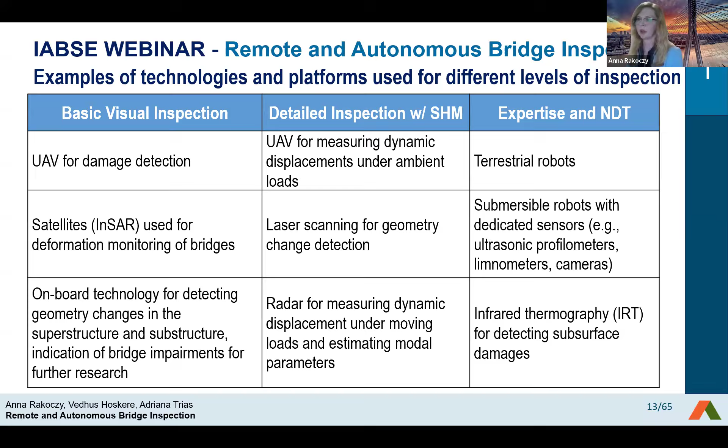So what are the advantages of using RITs and platforms? First of all, enhanced safety, reduces the risk of hazardous locations. Inspectors don't need to go to very high exposed bridges or some situations when there is active load and the bridge is still in operation.

Also time and cost efficiency when we have decreased preparation time and operating expenses associated with inspection. Also, RITs promote bridge management systems by facilitating the transition to digital bridge management systems. And last but not least, improved performance prediction, enabling the development of better performance prediction models and ensuring user safety.

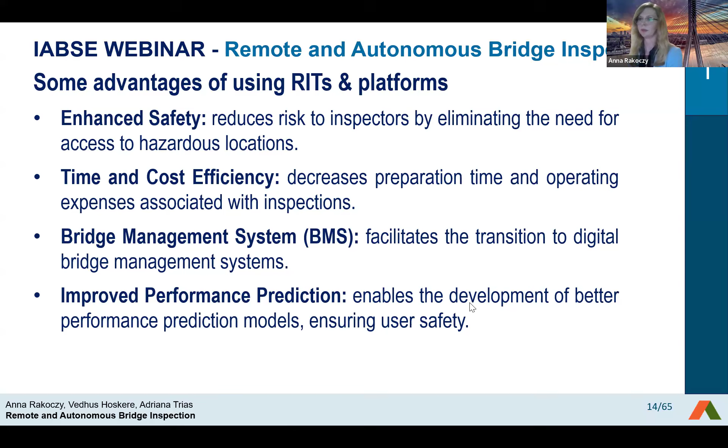Of course, with the technologies, we have also some limitations. One of the biggest limitations is the regulatory constraints. Sometimes we have regulations related to location where we cannot use UAVs. There are some restrictions, especially on locations close by airports or any military sites. There are specifically, by country and by state, different regulations, so it's better to verify that before you use UAVs for the inspection. But there's always a way of trying to get the permission.

Weather dependence, that's something that definitely provides some limitations, especially strong winds, bad weather, poor visibility may impact the possibility of using the remote inspection, or may affect the data acquisition and data quality. And the underwater challenges, when we have submersible robots, there are situations when there is just not the possibility of seeing through the water, or using the submersible robots with the water currents. So that's something that definitely can create a limitation of using the platform and technology.

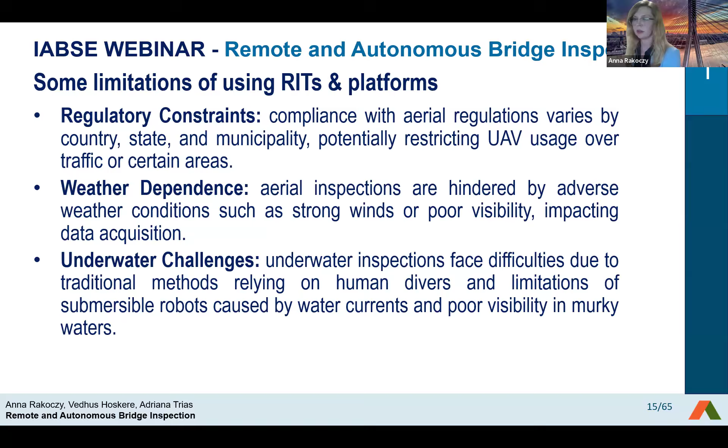I think now it's turn for Vedhus. Thanks, Anna.

So I'm going to talk briefly about some of these technologies that we can use for remote bridge inspection. Specifically, I'm going to talk about computer vision, which deals with making sense of pixels that are captured in images automatically so as to extract actionable information. So we'll go quickly over some basic concepts, and then when we go to the case studies, we'll see how this plays out.

Essentially, what we're doing is we're using different parts of the electromagnetic spectrum. We have some illumination. So when we have passive illumination, it's usually the sun that is illuminating the bridge. And then, of course, we can take pictures with different types of cameras to create images. When we use electro-optical cameras, like what you have in your smartphones, GoPros, or DSLRs and other commonly used cameras, then you can get typically 3-channel images where each channel corresponds to a different part of the visible spectrum, typically red, green, and blue colors.

But you can also have other types of images that correspond to other parts of the spectrum. When you have channels beyond simply RGB, but there's a discrete number of channels, then they're typically called multispectral images. And then you can also have a continuous stream of data across the channels. For example, if you look at a single pixel, you can have a continuous stream across different channels of the electromagnetic spectrum, and that's typically referred to as a hyperspectral image.

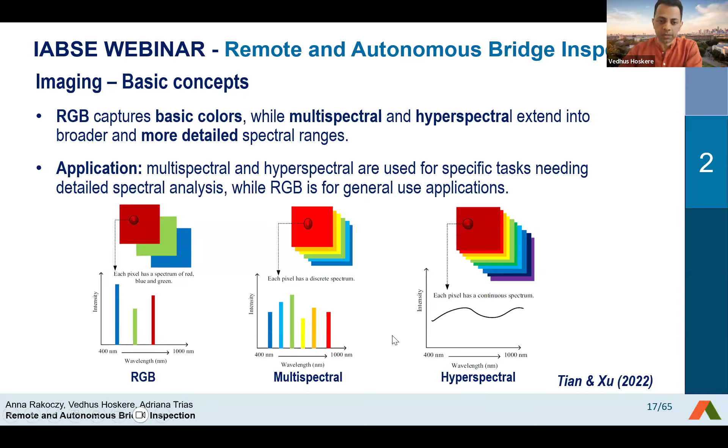Now, RGB images work by combining photodetectors that are sensitive to these 3 parts of the visible spectrum. And like I mentioned, they can be used for a large number of applications for inspections, because traditionally, and even currently, the main form of assessing the condition of an asset is with an inspector that goes out and carefully observes different parts of the bridge. And with the modern sensors that we have, it is possible to get close to the kind of fidelity and resolution that the human eye can pick up, provided you have the right cameras.

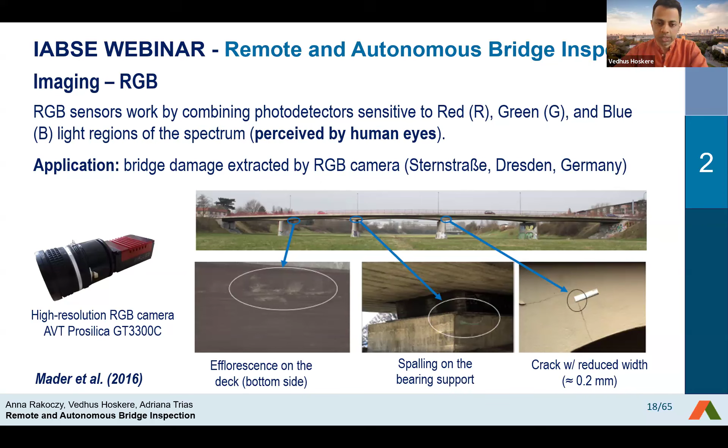And so it can then allow the inspector to document much of what they see, cracks, certainly spalling, and then also provide not only documentation, but the ability to then use that to make measurements subsequently. We'll talk a little bit more about how that happens. And also other defects such as efflorescence or corrosion that is visible.

Now coming to these other types of sensors, multispectral typically capture discrete spectral bands, looking at RGB or the near infrared spectrum, usually more than 3 but fewer than 10 bands. The spectral resolution, the number of bands, is usually not sufficient to distinguish fine-scale spectral features, which are features that vary in their response across different parts of the spectrum. Because there aren't as many bands, it's easier to process these compared to hyperspectral.

These are typically used for applications such as detection of corrosion, detection of anything that has moisture such as vegetation, and detection of delaminations, since delaminations have a different thermal response compared to the rest of the bridge. So multispectral data can be useful.

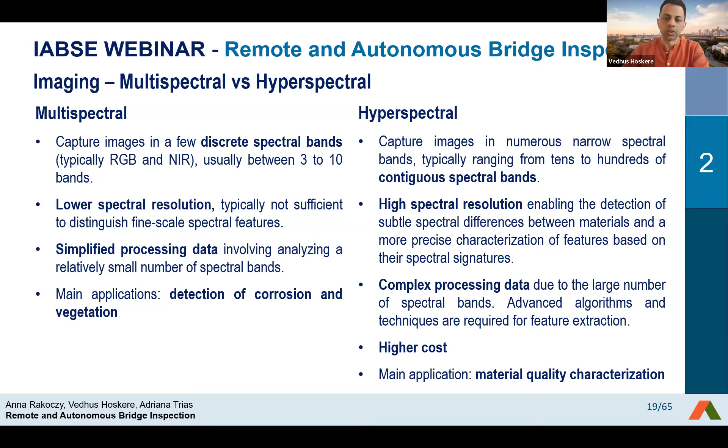Hyperspectral, on the other hand, has a much higher density of resolution across these bands, so it's more complex to process. It's much more expensive, and there's a huge amount of data, so you need specialized equipment to collect it. The main application is detailed material quality characterization, but you can also use it for detecting specific types of corrosion and corrosion behind coatings.

Here's an example of imaging with a multispectral camera, showing an RGB image and a near infrared image. On the image on the right, the result of processing, you can notice the locations of living vegetation, providing a different response compared to the rest of the image.

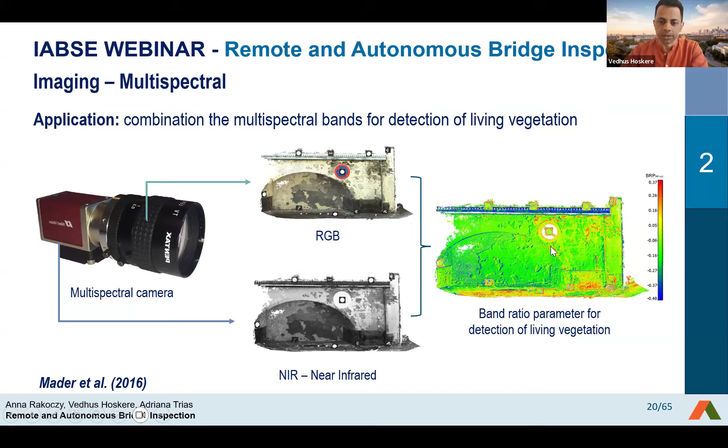Now here we have an example of the use of a hyperspectral camera. These images, because of the density across the bands, form a cube as opposed to just a set of matrices, so each individual pixel has significant data behind it across the spectrums. This is used surgically when you want to identify things such as early corrosion on steel components, as in this example on the Sydney Harbour Bridge.

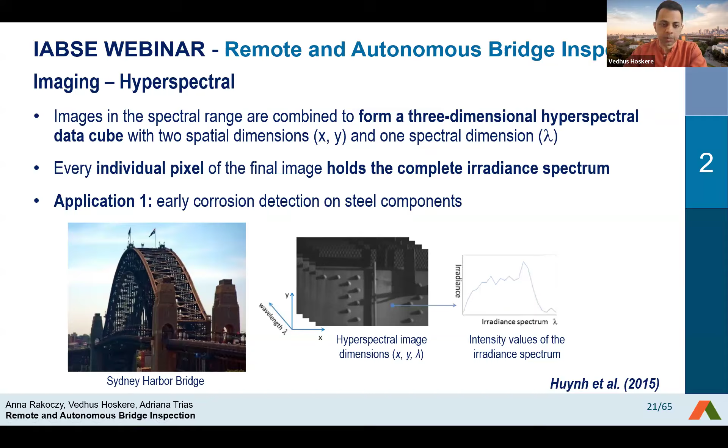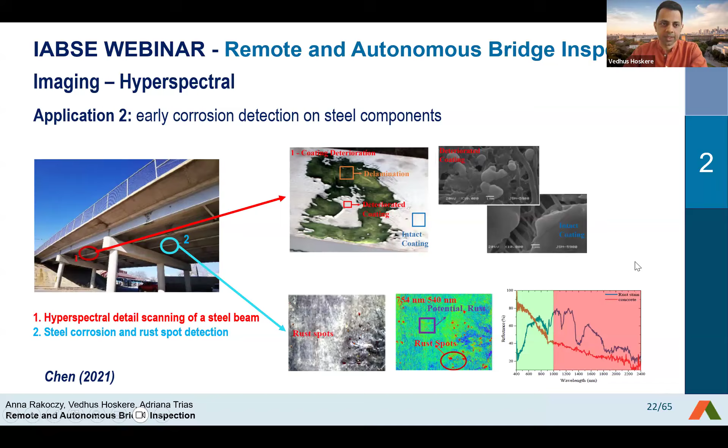Okay, I'm going to stop there and hand it over, I think, to Adriana. Me? Or to Anna, sorry. There's a couple slides for me now, and then Adriana.

Following up with the imaging, there is another non-destructive technique: infrared thermography. This technology relies on electromagnetic radiation within a specific wavelength range, considering material surface properties like absorption, transmission, and reflection, as well as volume properties including thermal conductivity and capacity.

During the process of collecting data, we look at passive or active IRT. Passive means utilizing a natural heat source like solar heating or ambient temperature changes. Active IRT requires external heating, like halogens.

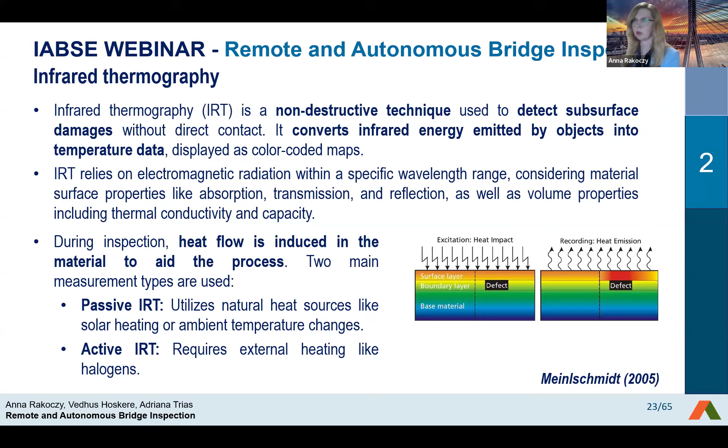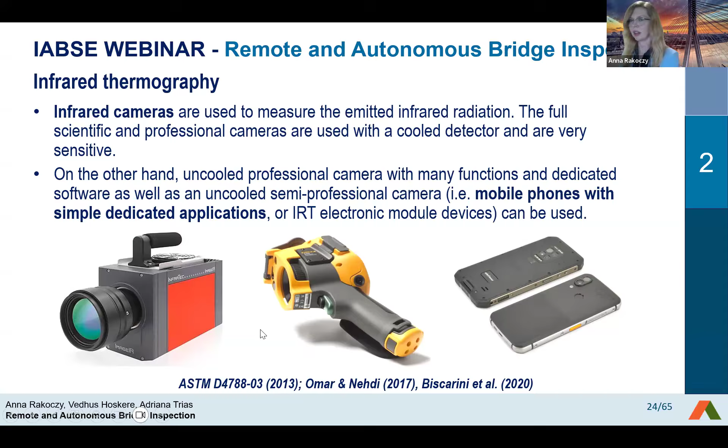To use this technology we need tools, which can be more advanced and expensive, but we can also use simplified options such as a mobile phone with a simple dedicated application, or IRT electronic module devices. This technology is developing, and there are more opportunities to use IRT even with cell phones.

At Warsaw University of Technology, one of my colleagues was using this technology to detect trapped water in the ribs of an orthotropic deck. There were several spans of this deck, totaling about 22 kilometers of ribs.

In some locations, the IRT showed a map of different colors, and we were predicting that these colors were linked to trapped water. During the visual inspection, we didn't see any corrosion yet outside, but after IRT inspection we were able to identify which locations possibly had that trapped water, and those ribs showing the darkest color were flagged.

We got permission to open a couple of them and confirm there were corrosion issues. So the IRT technique helped us identify where the issue was, and then confirm that with destructive testing. Unfortunately, once you know there will be an issue, we had to open it to confirm, which of course requires repair afterward.

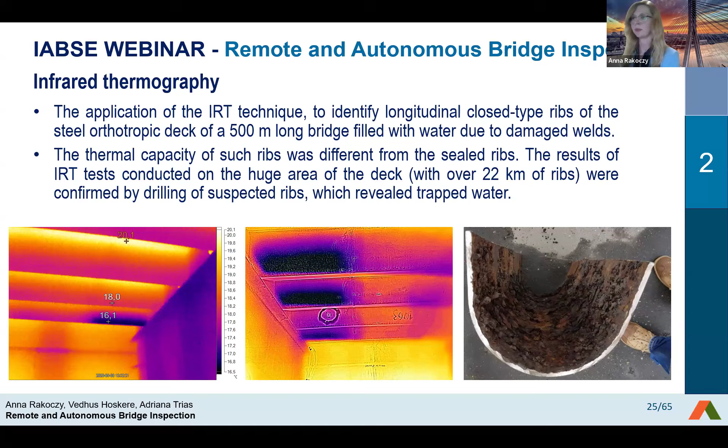But it shows that if you have a structure you suspect has an issue, such as with a closed section, IRT can definitely be of use, as an addition to other imaging methods. And Adriana, that's your turn.

Okay, so now I'm going to talk about LiDAR, which is the tool that I have more expertise on. LiDAR stands for light detection and ranging, and the technology uses a beam of light that quantifies the time it takes for that beam of light to touch an object or the surrounding environment and go back to the sensor. Based on that time, it can calculate the distance between the sensor and that object.

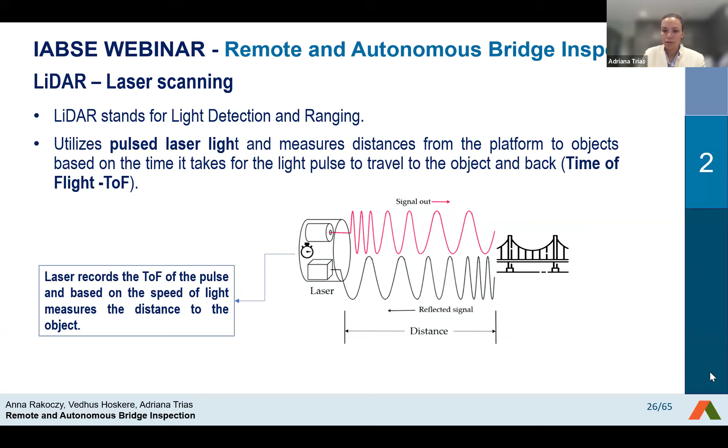It does this in a 360-degree horizontal scope, and vertically about 300 degrees, depending on the sensor, to create what we call a point cloud, basically capturing the entire surrounding of that sensor. It captures detailed geometric information. It cannot see through objects, so it cannot investigate box girders or anything enclosed. It cannot see through or inside, but it can characterize the external surface.

It provides point clouds that contain X, Y, Z coordinates, so we can convert these point clouds into as-is 3D models. This facilitates geometric surveying and supports rehabilitation projects. Once you have this point cloud, typically the information you have in the office is as-designed or as-built. The 3D point cloud will get you as-is. So if there's any spalling on the surface, any excessive corrosion that would decrease the thickness of steel members, all this information can be captured because it's changes in geometry, which can be captured with the LiDAR sensor.

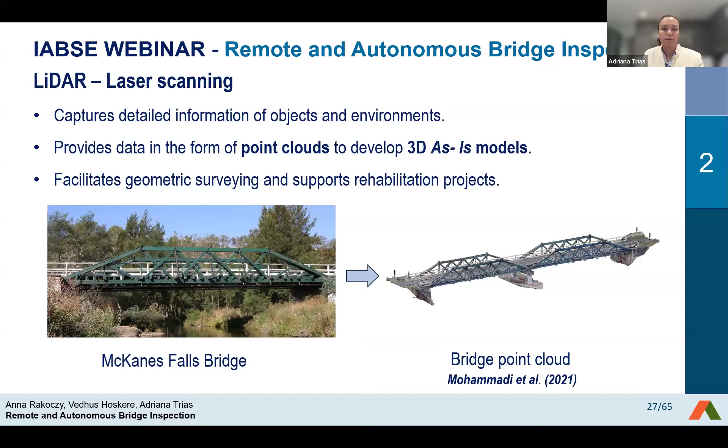LiDAR has 3 platforms it can be deployed on. Terrestrial laser scanning, or terrestrial LiDAR, is mounted on a tripod. It has to stay stationary while collecting data, and it has a higher accuracy among the 3 platforms, and it's ideal for 3D scanning for BIM purposes.

The mobile LiDAR is different in the sense that the sensor can be moving while collecting data. The accuracy of the mobile LiDAR is about 10 millimeters, whereas the terrestrial was 1 millimeter, so it's not as accurate, but it can collect data on a much larger scale. When we talk about mobile scanning, you mount the sensor on a vehicle and drive through while you collect data. In that sense it's ideal for mapping and capturing fine details on that range of 10 millimeters.

And finally you have airborne LiDAR, where you have the sensor mounted on a drone. It's typically the same sensor that you have for mobile scanning, just used for airborne scanning. So same accuracies, but because you're on a drone, now you can scan even larger, covering larger distances and larger scales among all 3 platforms.

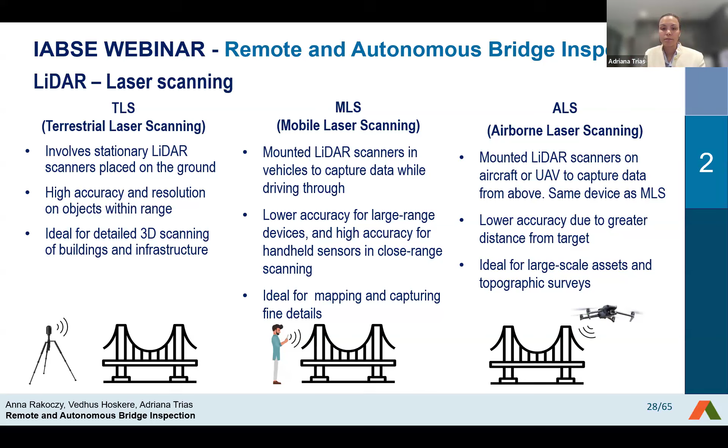So with laser scanning, the idea is that you can combine all 3 platforms. Maybe you have terrestrial, mobile for larger distances, and aerial for areas you can't reach, that terrestrial doesn't allow you to reach. You can mount your sensor on a drone and reach those areas that humans do not have easy access through. You can then combine all of these technologies, or all these point clouds that you capture with each platform, and create the 3D point cloud by combining all of them.

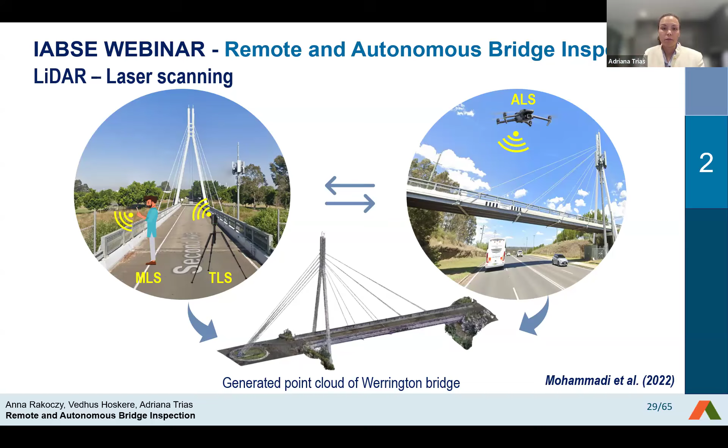Okay, so data processing. The first step for data processing is the improvement of station connections. You want to make sure you have a reference, or you can use targets, because you're going to need to capture data from several points. You're going to have to connect all those scans to create your uniform, connected point cloud. So you want to make sure that the stations where you scan from can be connected during the data processing.

Georeferencing targets is a strategy you can use. So while you scan, you can have spheres, white spheres, or checkerboards that are detectable by the scanner. Then it knows exactly where it is in reference to those targets, and the registration process is much easier.

Then the third step is cleaning noise and error control. In the case of bridge applications, you're going to have noise coming from vehicles driving by, or going over the bridge while you're scanning. Also from the movement of the sensor, or the movement of the bridge while you're scanning, that can also affect the quality of your point cloud. All these errors can be denoised through the software that comes with the technologies.

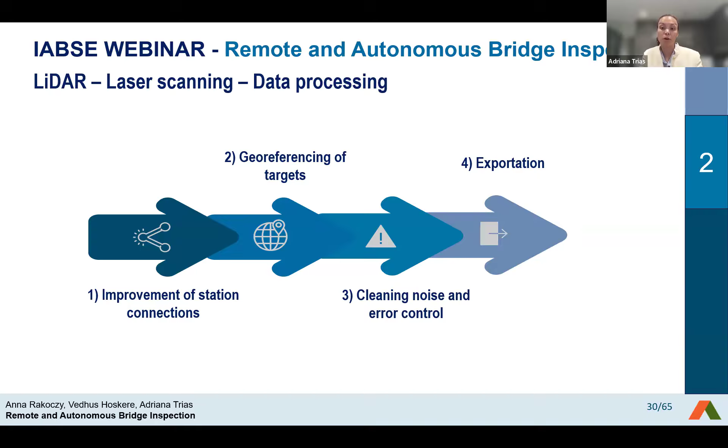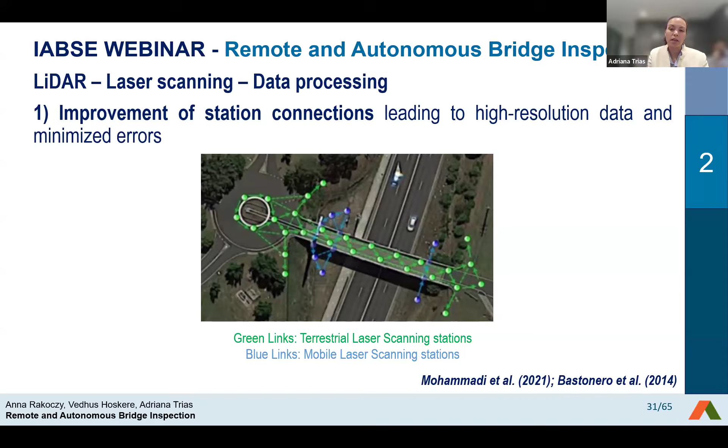So this is a more detailed explanation of step one. This is a case study on this particular bridge, and you see the two different technologies: terrestrial in green, and mobile in blue. In this case, mobile refers to scanning from a phone. If you know exactly where the location of your scanning is, the registration process goes smooth, much neater.

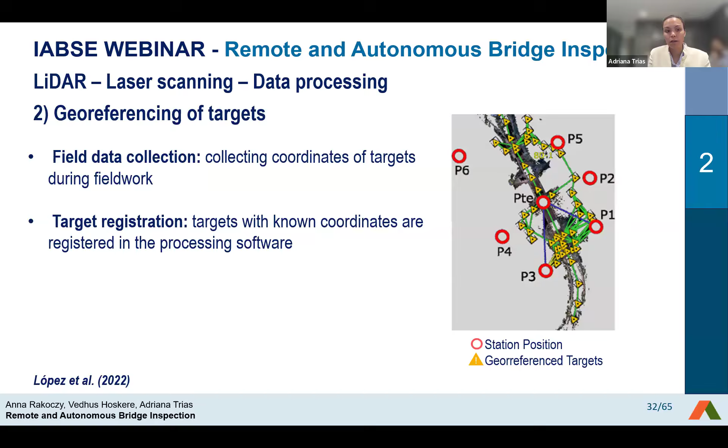Then step two would be georeferencing the targets. Here you have, how many, six stations, and the georeference targets refer to those stations, again for a cleaner registration of all the scans.

Step three is the cleaning process we talked about, denoising. Another thing you might want to delete from your point cloud is vegetation, just to get a cleaner look at your structure, in this case a bridge. Noise in point clouds can occur due to inaccuracies during registration, environmental factors, as I mentioned, from vehicles running by, and you can go through the denoising process to eliminate all of these.

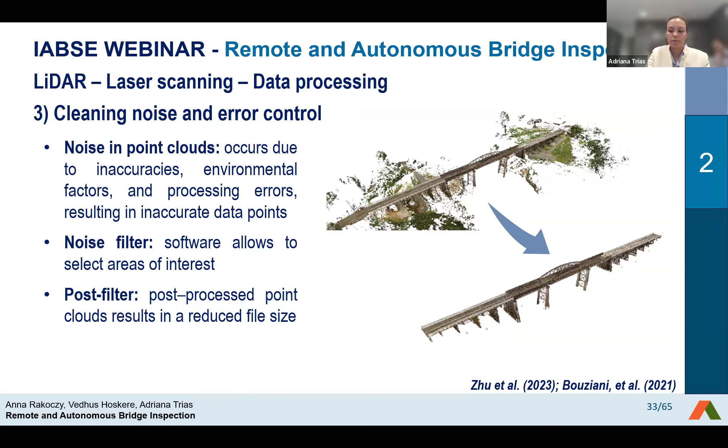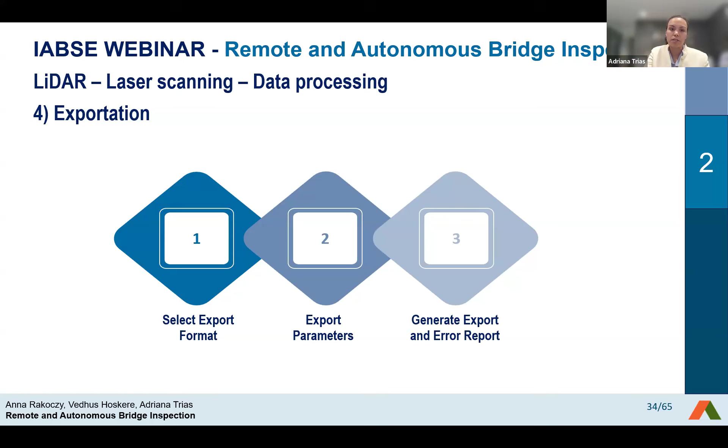Then step four, exporting the data. There are many formats you can use. You can even use a simple CSV file, just export X, Y, and Z coordinates, or you can have X, Y, and Z also paired with RGB, so color for every single point. Because it's point-based, it's easy to measure distances and any dimensions within the point cloud.

Okay, now changing to radar interferometry. Radar is similar to LiDAR in the sense that the technology emits an electromagnetic wave to grasp the geometry surrounding the sensor. This wave is outside the visible spectrum. LiDAR uses a single beam of light, so you can only do one point at a time. In the case of radar, it's a wave, so you can do multiple targets within the same wave.

Operating in the microwave spectrum, it can assess dynamic and static displacement. This is why it's ideal for mode shape detection, like looking at the dynamics of structures. The accuracy of this technology is very small, so you can reach 0.01 millimeters within a 500-meter range, so it's highly accurate. You can also reach targets up to 1 kilometer away, with a trade-off in accuracy.

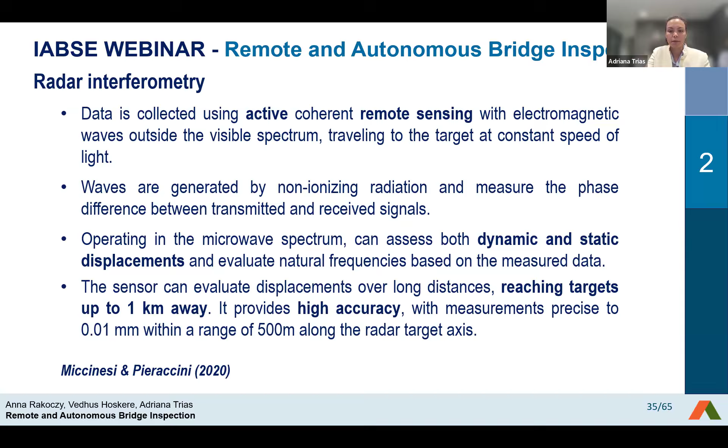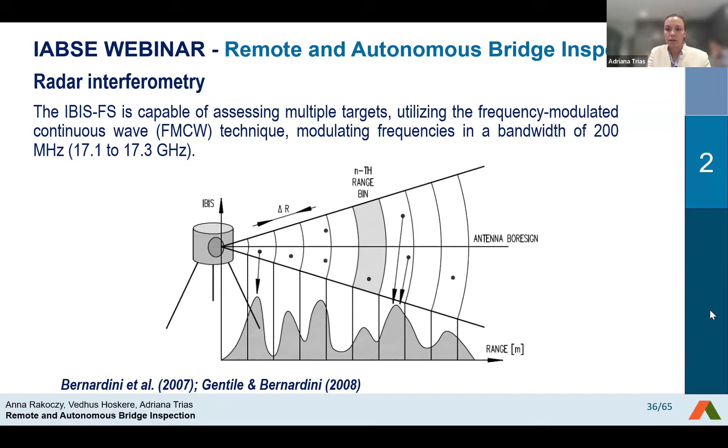So again, it's a faster data collection technique. It might require a little more data processing, but in terms of data collection, these technologies are much faster than contact sensors. That's the idea.

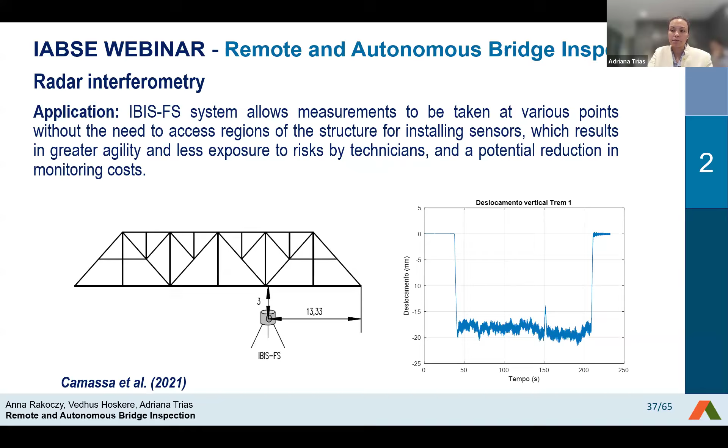So we're going to continue with some case studies. I believe Anna or Vedhus goes next. Okay, Vedhus. Yeah, I think it's me. If you can speak up a little bit. Yes, can you hear me okay? Yes, okay, let me know if it gets soft.

So thanks, Adriana, for that. I'm going to talk now about a few case studies. The first thing I'm going to do is recap these platforms.

Let me see here, I think I lost access to the screen. I think I can request control again. You should have access now. Okay, there we go.

I'm going to motivate this case study first with a problem that the Texas Department of Transportation had. And then they put out a call for proposals for this, and we submitted a proposal, and we've been working on this for a few years now.

The problem was that TxDOT wanted to use UAVs, unmanned aerial vehicles, to do remote inspections of bridges. They collected a lot of data from this Rainbow Bridge, not too far from where I am in Houston. Specifically, they collected 58 gigabytes of data.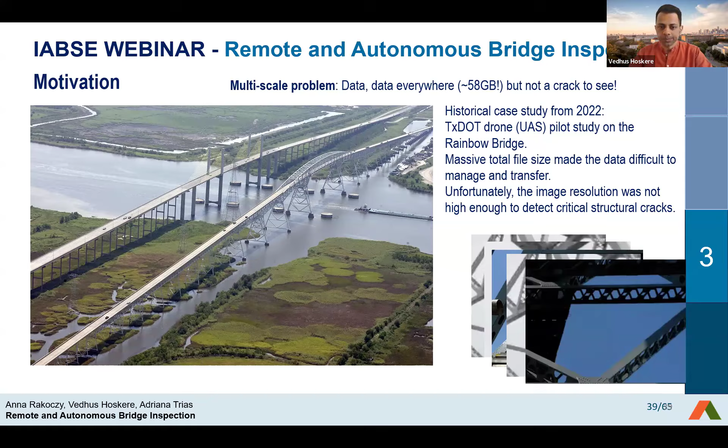For unmanned systems, you can have an aerial vehicle, so that would be a UAV. You can have a surface vehicle operating on the water. You can have a ground vehicle driving either on top of the bridge or underneath it, or an underwater vehicle looking at stuff beneath the water surface. You can also have manual data collection, where you can use any of the sensors we've looked at with both of these types of systems.

As far as sensors go, we have RGB cameras, thermal cameras. We also have accelerometers, which can be affixed on the bridge, and this could also be done remotely with robots. You can have GPRs, LiDARs, and strain gauges.

Now, with all of these platforms and sensors, we want to create a virtual representation that we can then use for decision making. An intermediate representation here that is useful is often called a reality model. This is processing the collected data and creating a rough as-is representation of the structure.

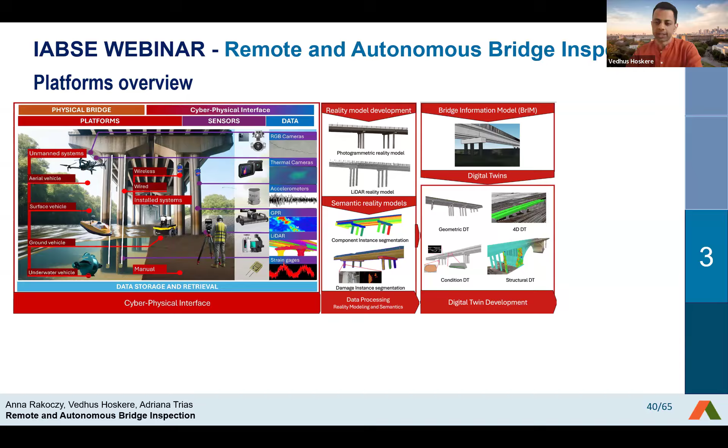Now, these digital twins can be used for different applications, and we call these digital services. These differ depending on whether you're looking at new bridges or existing bridges. For existing bridges, which is the focus of TG 5 and 5.9, there are virtual bridge inspections, where once you collect all of this data, you can do your inspection virtually. There's structural health monitoring, digital bridge maintenance, disaster vulnerability assessment, and fatigue assessment, to name a few.

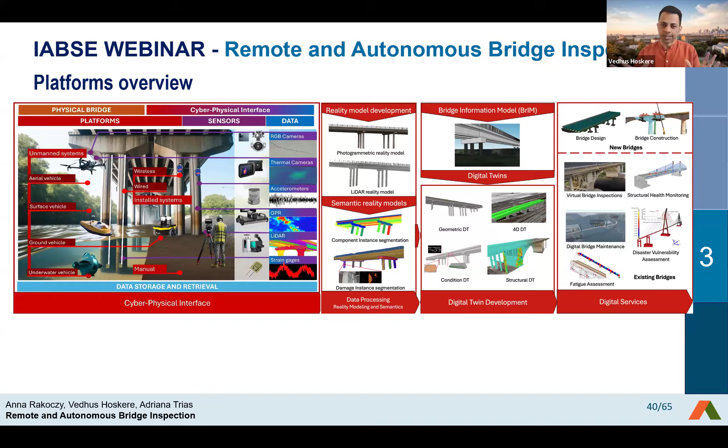Given that there are all of these possibilities, it becomes very important, when collecting your data to create this digital representation, that you first design your data collection process to meet what your objectives are.

So for that, a first step is to determine what your objective is. Depending on whether you want to collect data to do a virtual inspection, or to identify specific defects, your data collection plan is going to be vastly different. So you first have to identify a digital service.

And then, depending on the service you're looking to get, you can compute the data requirements given what platforms you have at your disposal that would be needed to make a decision. And then you can design the cyber-physical interface, which is what takes your physically collected data into the digital world.

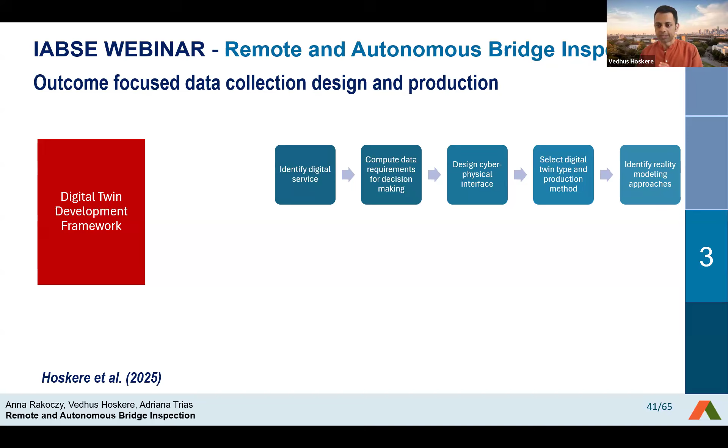Once you have that design, you can select the digital twin type and the production method, and then identify your reality modeling approaches. So this is a general framework for the design of digital twins.

Once you've designed the data collection procedure, you can deploy that to collect your data, create your digital twin, and avail your service. Because you're working through this to identify the details, when you execute it, you can actually make good on your initial objective.

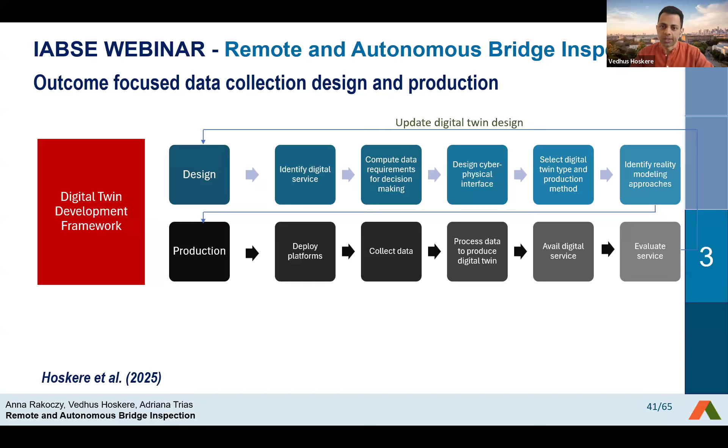And of course, this will be an iterative process, because once you go through the cycle, you can see whether your objectives were met, and if not, you can update the design to further improve your outcomes.

Now, when you're trying to use unmanned aerial vehicles, there are different types available in the market. Depending on your application, there could be several constraints. For example, depending on who the asset owner is, they may have restrictions on using certain types of drones produced by different countries.

Or they may not. But also, every state in the US at least has guidelines on how far you need to be when flying a drone from a bridge, depending on the amount of traffic, the speed limits on the bridge, and whether there's actually traffic operating on the bridge when you're flying. So all of those are considerations the operator has to be really well versed with before thinking about collecting data.

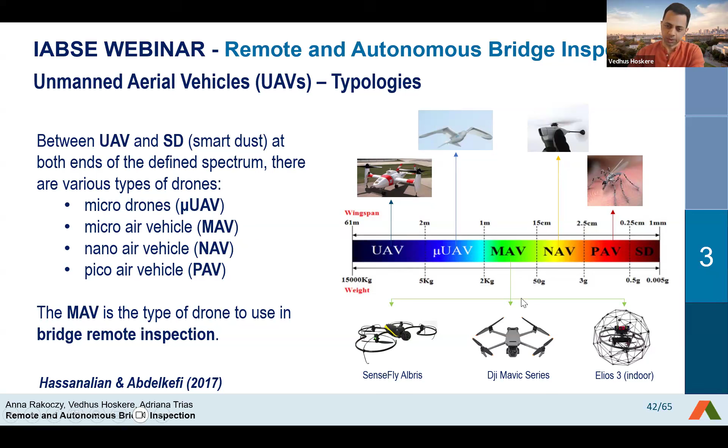Depending on the scale of the structure you're looking at, and also the position—whether you're going above the bridge, below the bridge, or next to the bridge—there can be different types of drones useful. Here we have examples of tiny drones to very large ones that you can use. If there are questions about what to use for a specific application, I'm happy to answer them.

Now, the most common type of sensor used with a UAV is the electro-optical camera in the visible spectrum, and then also a thermal camera. These can be used to create reality models with photogrammetry.

This is an image from Rafael's paper—I think Rafael's on the call, at least he was at the start—where he created photogrammetric reconstructions of three bridges in Portugal using data collected from a drone. You can see the fidelity of these models is fairly good, but it does take some planning to achieve this.

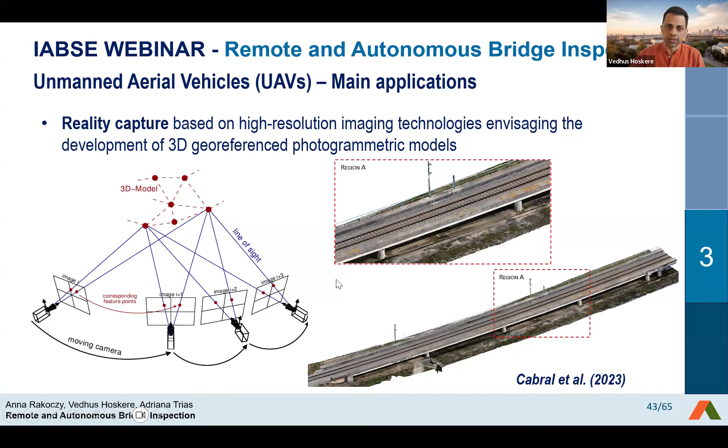The other type of sensor commonly on these drones or UAVs are thermal spectrum, or infrared spectrum, cameras. With drones, typically you're only using passive thermography, meaning you're relying on ambient thermal excitation from the sun to see variation in thermal responses of the bridge.

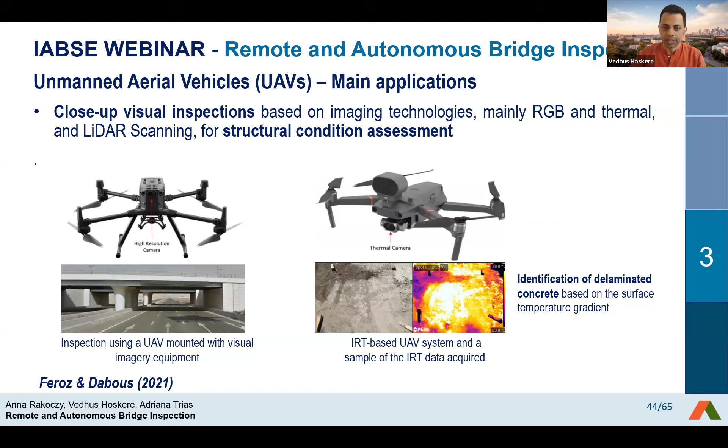The type of defect most commonly identified is the delamination of concrete, because there's going to be a difference in temperature of a delaminated part due to the hollowness underneath compared to other parts of the bridge. So if you're looking at the deck, you'll typically be able to identify delaminations using thermal sensors on UAVs.

Now, going back to the efficiency problem, you want to make sure you plan out your data collection based on the specific application you're looking at. But you also want to utilize as much information as you can acquire about the bridge and its condition while coming up with this plan.

So when available, utilize past inspection data to reduce your search space. The way we propose this be done is to use past inspection reports. So if you're doing the inspection of an existing bridge, typically you'll be able to get access to the most recent inspection report from the asset manager, and you can use that to identify cracks in each zone.

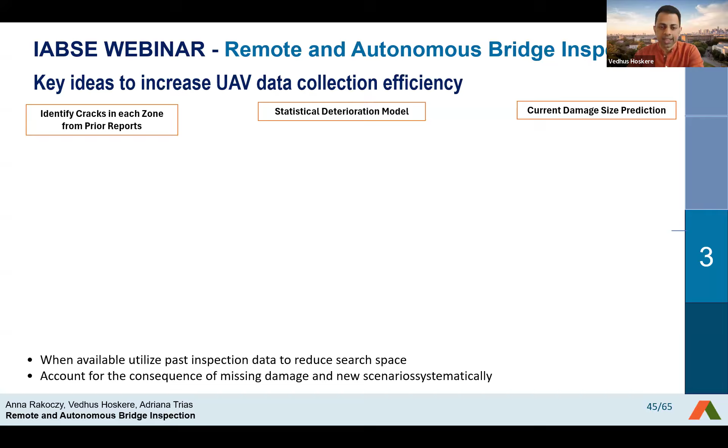And we have a glossary of different types of zones useful for the purposes of UAV path planning. You can reach out to me if you're interested in that information, but we'll be releasing it publicly soon as well.

Then what you can do is get an estimate of the current condition of the bridge, which gives you a little bit more fidelity in terms of where cracks are likely to be. You can achieve this using statistical deterioration models. We've developed some of these models using a large number of reports for bridges in Texas, specifically for pre-stressed concrete bridges, which are the most common kind. If you have that kind of bridge and you're trying to guess the current condition of cracks based on the previous inspection report, you can use that. But even if you don't have that, you can use the data from the previous report as your guess for the current condition of the bridge.

If you're using some of the commercially available drones, the main two things you're optimizing for are the gimbal angle and the distance of the drone from the bridge. The farther you are away, the less you'll be able to see; the closer you are, the longer it's going to take. So we've come up with some curves based on the sensor that help you characterize the probability of missing damage. We want to use both the probability of missing damage as well as the consequence of missing that damage to come up with the risk of doing a certain inspection flight path.

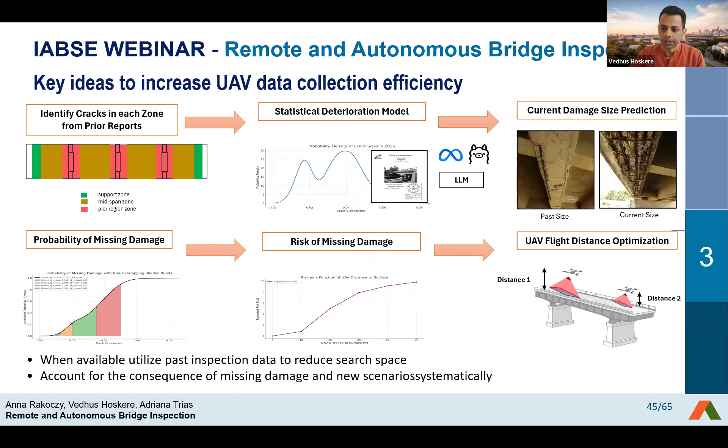Then you can optimize for the UAV flight, and we have a tool that can do all of these things for you. Here's an example we did on a bridge not too far from our campus, where we're looking at one option where the distance of the drone from the bridge is about 10 feet. In this case, there's no risk of missing any damage, and the time to capture is going to be 55 minutes. Whereas in the second case, the distance is 16 feet, the risk of missing is 25%, and the time to capture will be 30 minutes. So this is just to illustrate the trade-offs here.

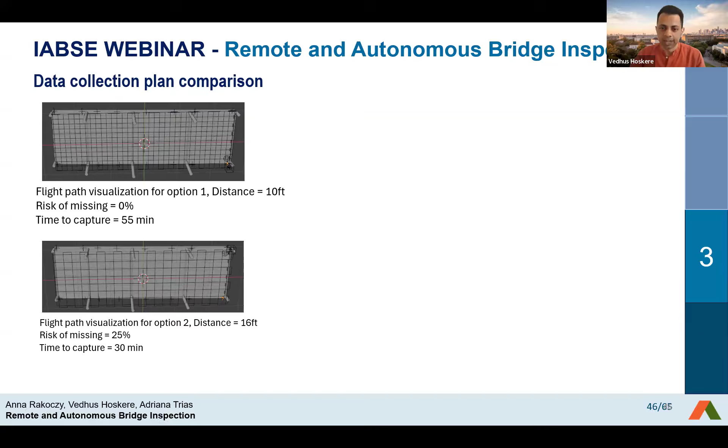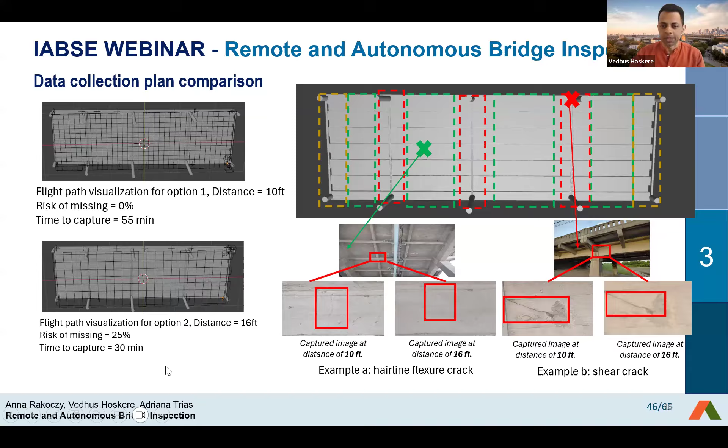You can see examples of images collected from both these scenarios. In this first case, the hairline flexural crack, you can clearly see in the 10-foot image, but in the other image it's barely visible. Whereas the shear crack, which is very critical, can be seen in both these images. So there's a little bit more risk in the second case, but depending on the size of your bridge and how much time you have, you can take a call, backed up by this framework, as to what data you want to be collecting.

Now, once you've collected that data and created your reality models, one example of an application could be an image-based inspection. You're using the data you've collected to assign condition states to different members, to different elements of the bridge. Here's one example of a bridge we collected between Houston and Austin. We identified elements, just using the images, that are not in condition state 1, and you can see those here. We were then also able to compare with previous inspection reports to show that we found additional elements that were not in the inspection report previously, but also all of the ones that were.

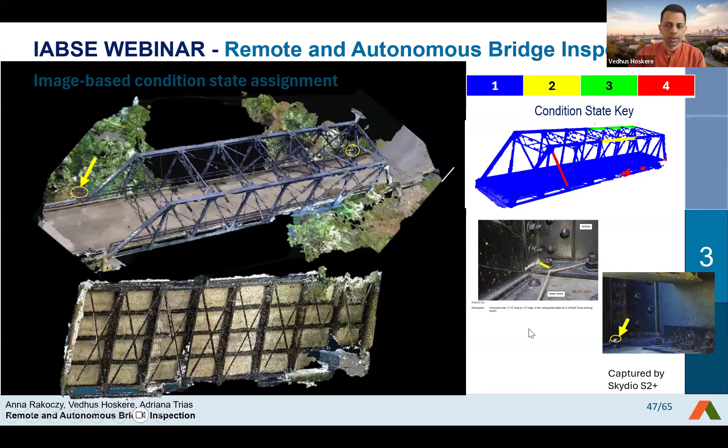Moving on to the next logical step, if you have all of this data, can you use AI agents to look at this data and help you make sense of it? We've come up with methods where you can have an AI agent of your choice operating in this virtual environment, which we call a virtual embodied agent. What the agent can do is, for a specific question, decide which images in your scene it wants to look at, then come up with a detailed response, and also give you the specific images it used to make that response. At the moment it's not perfect. We've evaluated it against human inspectors, so it's not perfect, but it's very good, and you can use it.

You can plug in different VLMs from OpenAI or Gemini, or open source ones such as Gemma, and it gives you a good first draft that you can then go more deeply into and tweak until you're happy with it.

So I do want to play this, but it allowed me to pause it, but it's not letting me play it. Let me go back. Maybe, yeah.

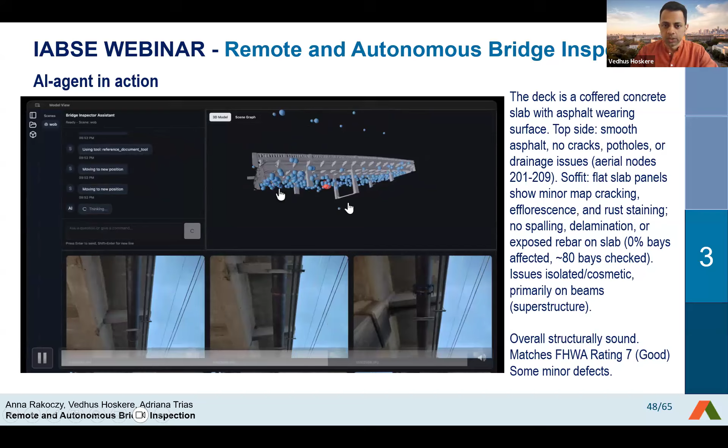So here what you'll see is a question: what is the condition rating of the deck? And you can see this red dot moving around, which is the agent deciding which spots to go to and looking at the images in those spots, and it's basically filling stuff into its working memory.

And then it comes up with certain images that it used to give you the response, and it gives you something about the deck, and then something about the soffit, and it says there's no spalling, no delamination, no exposed rebar. None of the bays are affected. It checked 80 bays, and overall it gives a rating of 7 because there are some minor defects.

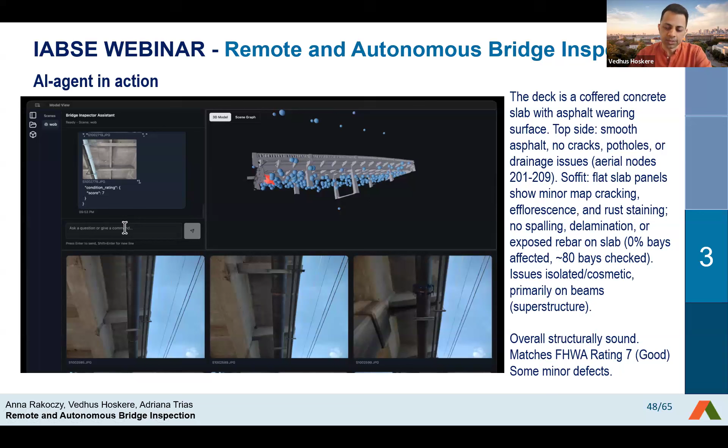And so then you can probe it and give it more questions and say, okay, maybe you missed this, or did you check this? And it can go ahead and do that. So that's kind of where things are going as far as making these more autonomous.

Now, other applications of using UAVs - in the past we've used UAVs to measure mode shapes of vibrating bridges. There's this popular study we did almost 7 years ago now, where I used a Phantom 3 at the time, and we had these Aruco markers on this pedestrian suspension bridge, called the Little Golden Gate Bridge of Mahomet, Illinois.

Of course it's much smaller than the actual Golden Gate Bridge, but similar style, and it was a very good test bed for us to experiment with. As the bridge was vibrating due to pedestrian load, we captured vibration of the bridge with the drone, then we went in segments, and stitched together this information to create mode shapes of the whole bridge and also get the natural frequencies.

And since that time, lots of people have worked on this type of application. The key idea is that the frequency of vibration of the drone is typically in the very low spectrum, and for the bridge it's usually a little bit higher than that. So as long as there's some gap between the frequency of vibration of the drone and the bridge, then you can filter out these two signals and use that to get your information about the bridge.

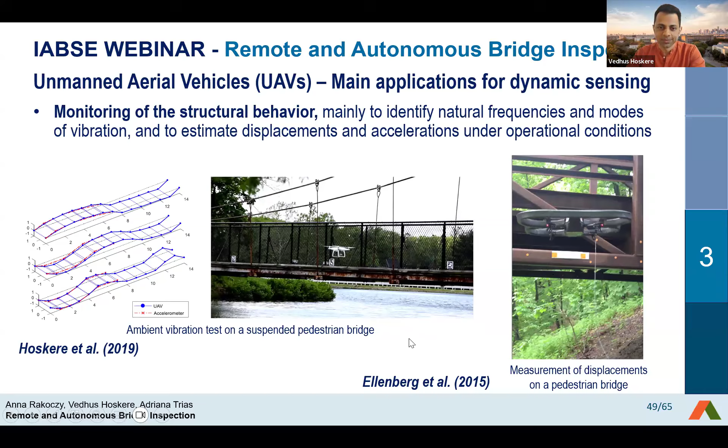And these days, increasingly, we're seeing drones being used to do operations on bridges, and these could be simple things such as taking readings from existing sensors. It could also be things such as affixing or installing sensors, or spraying different types of protectant coatings, or for washing, cleaning, painting, etc. So there are a lot of possibilities that drones can be used for in helping maintain our existing bridges.

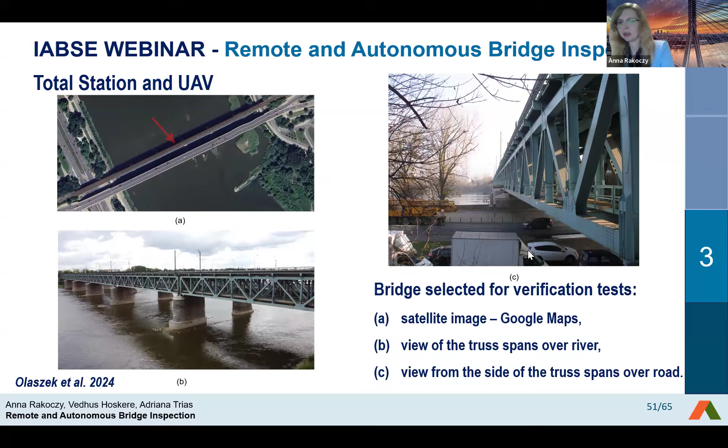Okay, I requested the access, but I don't... Adriana, can you move? Because I don't think I can. Oops. Or maybe I moved, so can you go back one slide? I will let you drive. I think you did okay.

So as Vedhus mentioned, you choose the technology for the objective, what you want to achieve. In this case, we wanted to explore total station and UAVs and find out the geometry. We selected the gusset plate that we wanted to focus on. We didn't expect what we would find.

That bridge is about 45 years old. It doesn't have any issues. We had monitoring from that bridge, and the displacement didn't draw any attention to us. But when we started to look at the geometry, we noticed that the geometry of this gusset plate looks suspicious. There is a location where the gusset plate angle goes very suddenly into the straight line, which means this is a potential issue of stress concentration.

On the technical drawings that were available, it didn't appear that this was recorded. So we were surprised, because the bridge is 45 years old but had maintenance 10 years ago, and there was new technical documentation prepared with that maintenance. So what we discovered brought us a question: how might that actually affect the performance of the bridge.

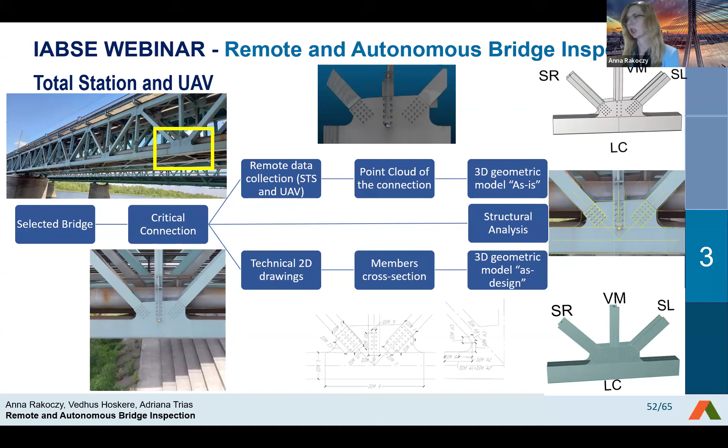But can you move to the next slide? I just want to show how we developed the point cloud. We employed the total station, so LiDAR, to get a close view, very steady.

But then we also had a UAV with photos collected, and we used photogrammetry, trying to do an overlap of both. Because what we discovered, the different angles from the UAVs help us determine the exact boundary of the geometry of the gusset plate, while the total station gives us a very detailed point cloud.

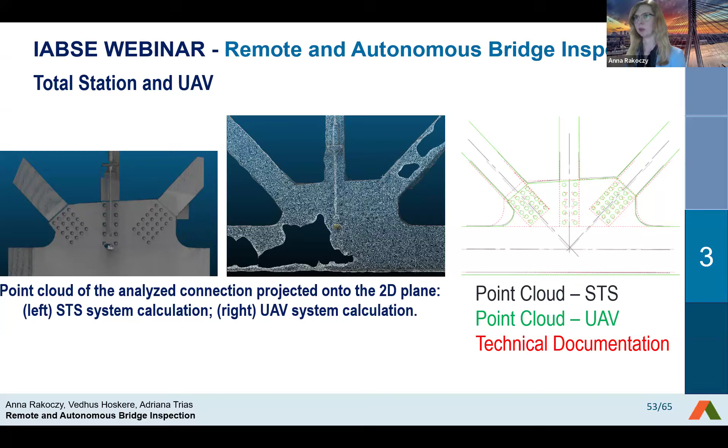And one more thing: the total station and the UAV, both platforms, two different technologies, provided very close matching. If you look at the green and black lines on that drawing versus the technical documentation, the red one, it's definitely different. So this was a very good finding for us, and it provides a feed for the next stage of the project.

So while the other case study is still under continuation, I want to also mention something that is maybe unique compared to other technologies we had heard today: onboard vehicle-assisted technologies. I started working on this when I was at the Transportation Technology Center in Colorado, 2012 to 2014.

We had a set of test data in controlled conditions with many different vehicles, rail cars, locomotives, that had multiple sensors on the cars. Through those multiple sensors on the cars, we were trying to investigate if we could see the response of the bridge. So the vehicle, track, and bridge interaction was the focus of our study.

The onboard sensors mounted on the so-called track geometry car provide a lot of detailed information about track performance - specifically right and left rail, any super elevation, any discrepancy between the rails, vertical position. There's a lot of information that's used and very valuable for the track. And the idea is, if those are available already, why don't we use them for evaluation of bridge performance?

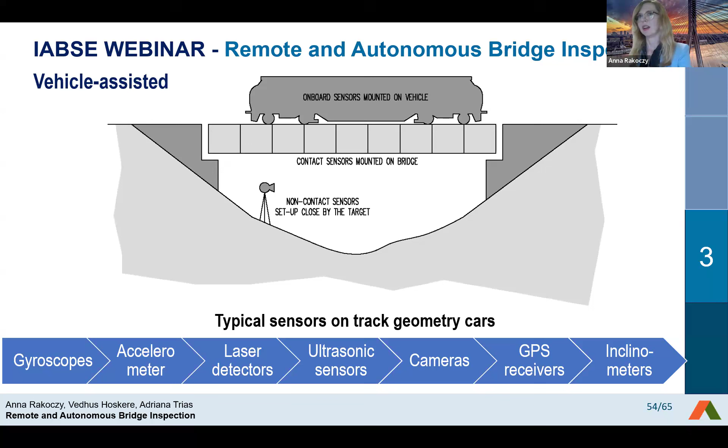So the only thing is to be able to understand what is collected and how to interpret it when the vehicle is passing through the bridge. What we can do with the data is look at the dynamic response of the railroad bridge under traffic.

The big advantage of using the onboard system on the vehicle is that it allows us to collect data not just from a single bridge, but for the entire line that this vehicle is passing through. It's really a tool that I think is not yet at the level we are using it, and we could probably make a big advantage of using the track geometry car.

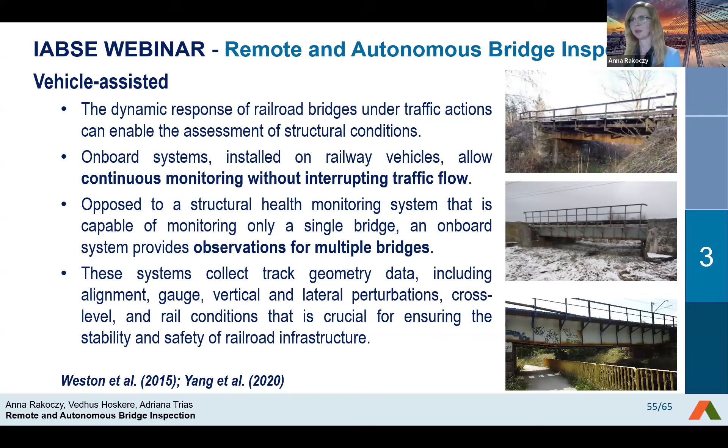Again, this is more looking at the general behavior of the bridge, so it's not going to show us if there is a fatigue crack, but it can show us some deterioration on the approaches. It can show us the change of stiffness, and again, it can observe multiple bridges through one run.

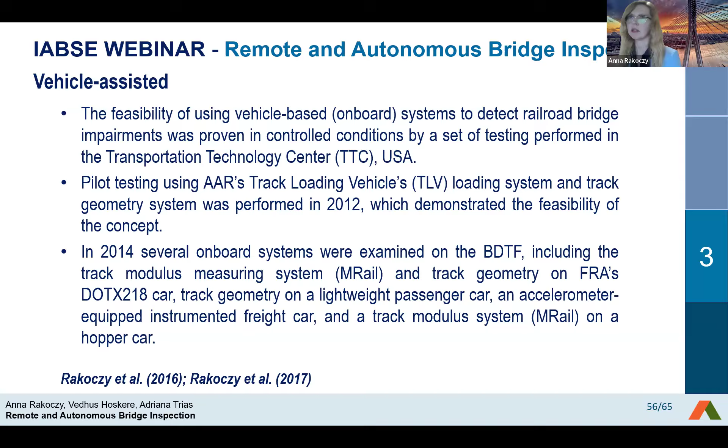As I mentioned, I explored this when I was a TTCI employee, 2012 to 2014. We started working on the project and continued in 2016. Different cars, different systems, and different data accumulation provided us very consistent information. We were able to interpret the data and confirmed that those systems work. There are two publications following up on that research, 2016 and 2017, if you want more details about that study.

Can you move to the next slide, please?

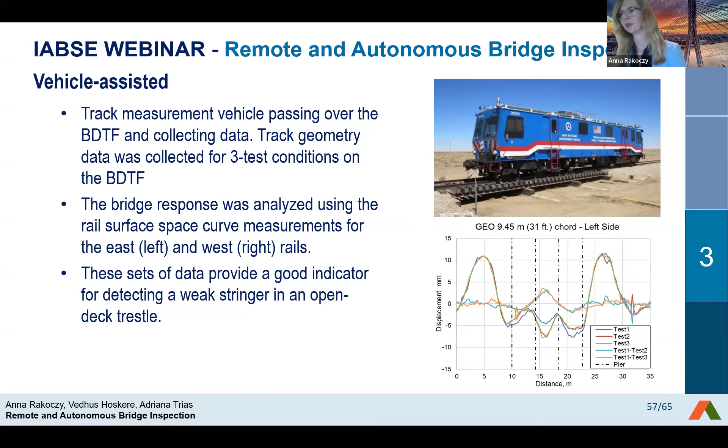As a follow-up, a more recent field study was performed in Poland. When I returned to Poland in 2021, we looked at the same track geometry cars - very similar to what I experienced with data collection at TTCI. We were able to look at the track geometry car data from a line of bridges, but there were no control conditions. We didn't know exactly what was going on with the bridges, so this was really a blind test - we had the data but no other information.

From that data, we were able to look at specific bridges, specific locations, and identify changes in bridge behavior. Further investigation confirmed there was either an issue with the approach to the bridge or a ballast condition change on the approach. So again, a bit of a different perspective in terms of remote inspection or remote investigation of the bridge, but very promising since this is an existing system. The main challenge is we needed more information on how to detect the specific location of the beginning and end of the bridge, and once we identified any issues or changes - since basically what we're looking at is changes - to go verify if there's anything evident related to the condition of the bridge.

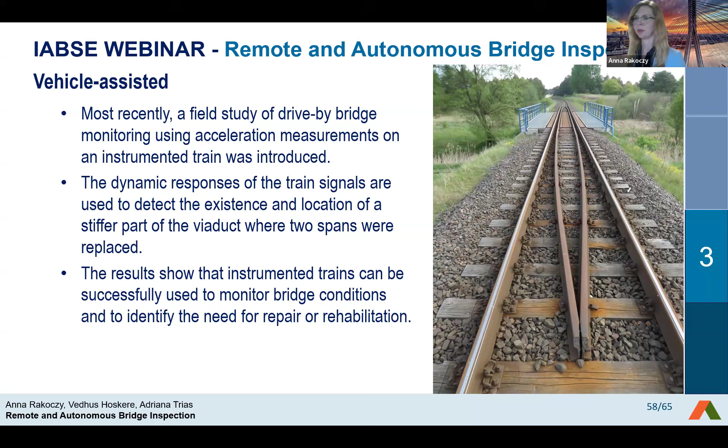I think the last slide will be a wrap-up. Thanks so much for being with us today. I think we've covered most of our experience showing you how to use remote inspection.

There are so many different technology platforms available, and these topics are growing every year. There are tens or hundreds of publications showing different applications and improving performance, accuracy, data collection, and data interpretation. We showed you integration of imaging, LiDAR, radar, and other technologies that provide comprehensive assessment, leading to improved safety, precise results, and controlled cost. Bridge inspection requires technologies that incorporate various platforms - very often one technology may not be enough. Supplementing with other technologies gives us a better picture and more significant results, showing that these platforms and technologies in combination can provide the full spectrum of information you're looking for.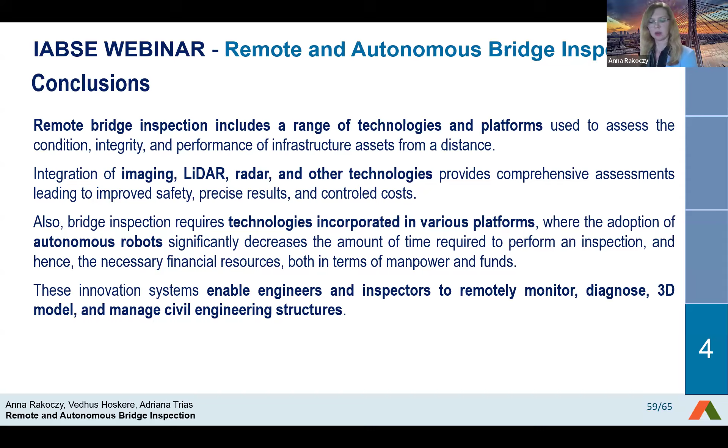This innovation system enables engineers and inspectors to remotely monitor, diagnose, build 3D models, and manage civil engineering structures with remote sensing, and with a more aware system. So after data collection, you are equipped with more information that you can use further in different aspects. And with that said, I think we are done with the technical content.